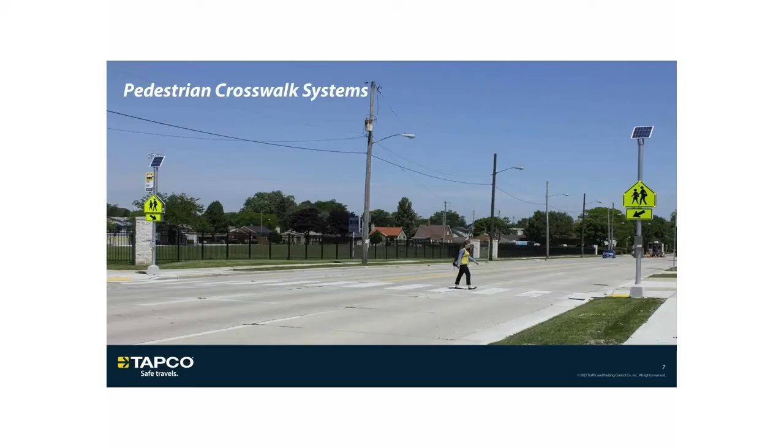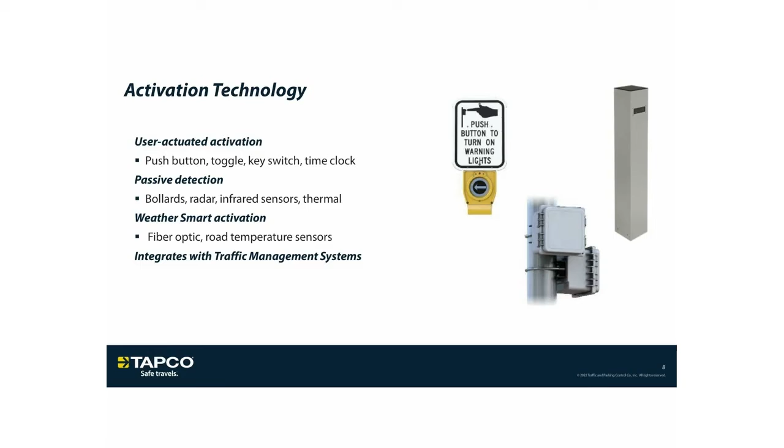First, we're going to talk about our activations. We do have our user actuated activations: push buttons, toggle switches, key switches, time clocks. Some of the other things we have on the contract are our passive detections, including bollards, radar, infrared sensors, and thermal, which we'll talk about a little later. We can also do smart activations with sensors that deal with temperature, animals, radar, fiber optic, and come to TAPCO for your custom solutions. We can integrate with most traffic management systems.

One of our newest push buttons is our INX push button. The great thing about this is it's Bluetooth capable. It does have the PedApp for visually impaired, so they can activate them on their phone. It's also a push button that has great communication. So in areas where there's an older generation or visually impaired individuals, this works great, but anybody in the area can use it.

Also, with COVID coming on, we have our newest one, becoming pretty popular, which is our IDX. It's a touchless option. All you have to do is wave your hand in front of the button and it will activate.

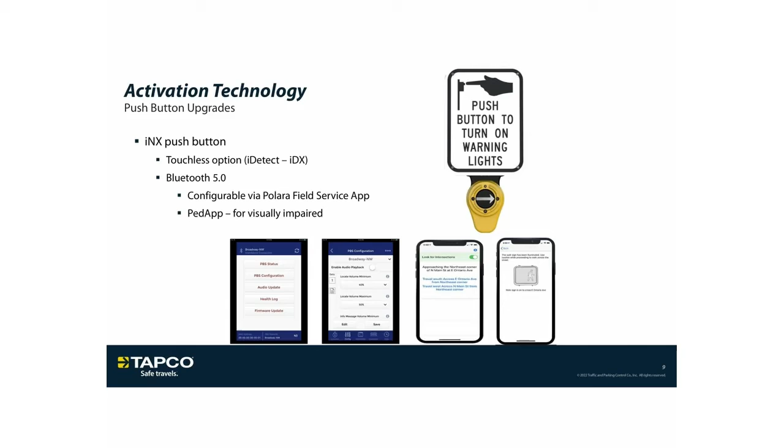Next, we have our proprietary radios that TAPCO's come out with. For wireless communication, the great thing is we can always trench for you if needed, but the great thing about our systems is we do have wireless communication.

The 900 megahertz hopping frequency allows for instant communication, especially in RRFBs where there are tight tolerances to be held. We've made our wireless radios easy to use with easy to read displays and a joystick.

The other great thing is we can also extend the distance. We have a range of up to 900 feet, and by doing multiple options and repeaters, we can increase that distance if needed.

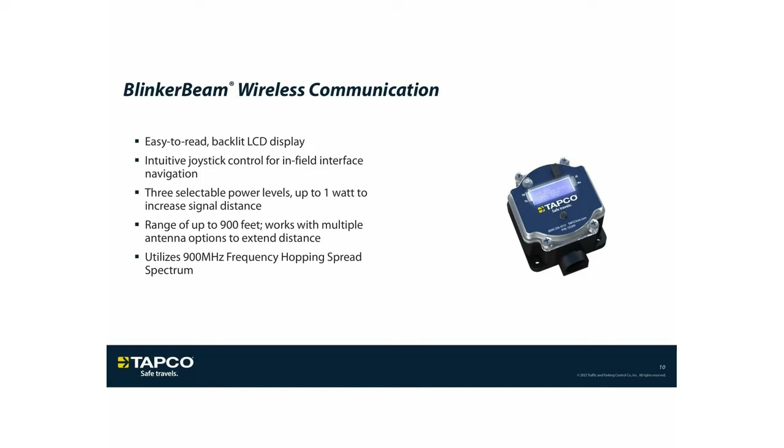Next, we'll get into our LED enhanced warning alerts. The first one is our blinker sign. The great thing about our blinker sign is that it's a highly visible traffic sign with LEDs embedded around the perimeter. They're MUTCD compliant.

They also come in multiple sizes, colors, and legends. We have 3 LED colors available: amber, white, and red.

Our team, myself included, will help you with the right design and fit if you'd want something custom. We also provide artwork and definitely proofs, touched on the points there.

Some of the other great things about our systems is they usually come solar powered, and we can solar size them based on autonomy and different applications. We do have 24/7 options as well. We have quite a few different options, but we can solar size them, and they're MUTCD compliant.

Some of the other features are we ultrasound weld the LEDs for an environmentally sealed fit. We use aluminum channels to protect against inclement weather and tampering. We also use 080 aluminum, and 3M's diamond grade reflective sheeting with 3M's anti-graffiti overlay film, so it's easy to remove any graffiti that may show up.

Alex, is there anything else that you want to add that you think is key about our blinker sign?

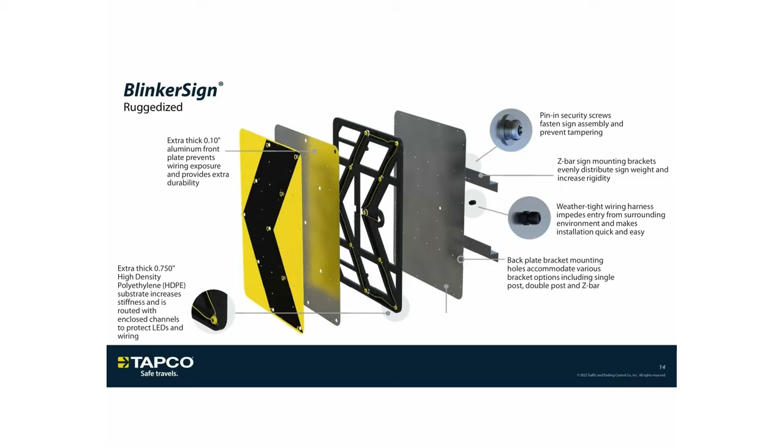Next, we have the blinker beacons. These are great, industrial grade. We can do 12-inch or 8-inch beacons, and we can do multiple configurations, so we can definitely customize them.

Either top and bottom, or a lot of times with school zones, I've seen it where there's two beacons, top and bottom, facing traffic, and then there's one on the backside on the top as an indicator for anybody coming the other way.

Kevin, are there any iterations or setups that are most common in Ohio that you're familiar with? Anything we've been able to produce here that works well for your customer base? Yeah, definitely. The top and bottom is definitely used for a lot of school zones, and having that beacon on the backside at the top is another popular function in Ohio.

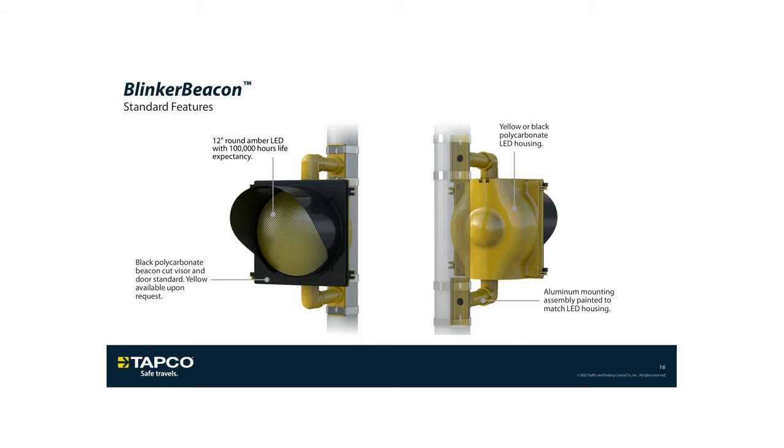One of the other things to touch on quickly is we have the 12-inch LED shown there. We can do that in amber or red. The LED housing can come in yellow or black, and we also paint the assembly to match the housing color. We also have the cut visors, and those are standard black, but we can definitely make those yellow if needed.

Next, we have the rectangular rapid flashing beacon, or RRFB. These are FHWA compliant. We have the wig-wag plus simultaneous flash pattern, and the light bars automatically dim for ambient light usage.

Also, real quickly, we do have a black powder aluminum housing, but the great thing I want to point out is the pedestrian indicator can be set in the field. We have a little plastic cover that you just remove either on one side or both sides, and a lot of times that is a requirement, so pedestrians can see that the system is activated.

Yeah, Alex, is there anything to add? Yep, just to add a little there—what's really nice about TAPCO's RRFB systems is the ability for it to be flexibly mounted and field configured, with that pedestrian indicator being a knockout on either side of the device, the universal mounting kits, and maintaining IA 21 compliance. We can alter flash patterns and manipulate our controller as appropriate for any unique application. We've put these rectangular flashing light bars in applications for wrong way driving in the past, using a wig-wag flash and things like that. As you get creative with devices, obviously we're going to lean on FHWA and MUTCD compliance again and again, and that's the standard we're all complying with. But if there's a unique application, if there's something we want to be creative with, float that past us, and our team will take a look and offer consultation about what we can do to meet your goals.

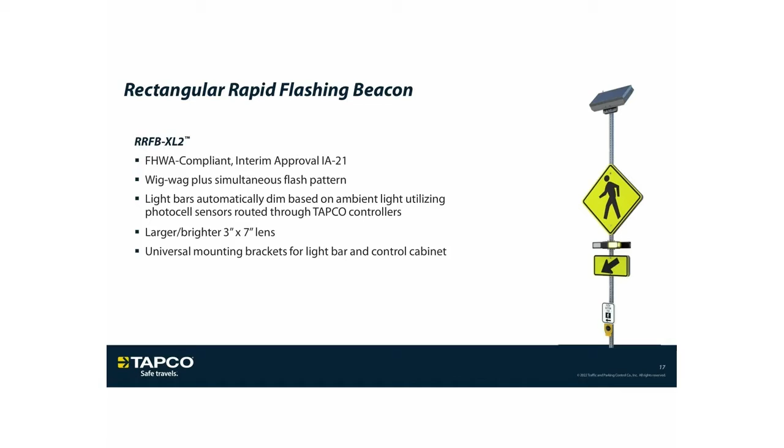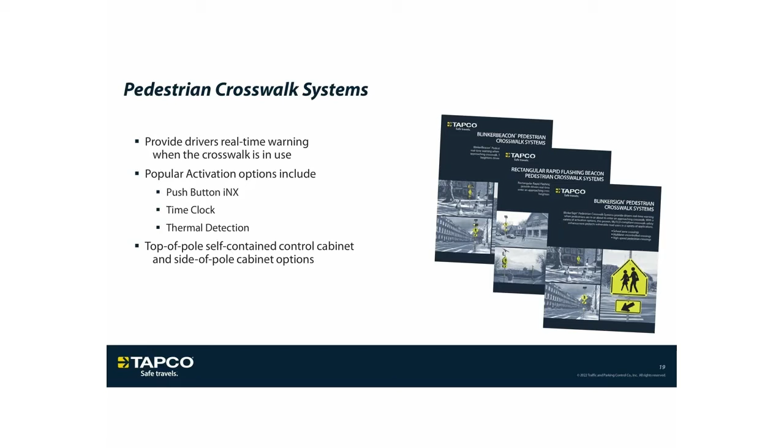So just touching base again on the pedestrian crosswalk system, we like to provide that real-time warning. We definitely have multiple options, the new push button INX or IDX, time clock, thermal detection, which we'll touch on in a bit. Come to us, we'll get you designs and customize. As you can see, we have a lot of different pamphlets about it, so I can definitely get you that information if you're interested.

But once you set them, unless you have to change a battery, they're pretty easy. They take care of themselves, and they're also easy to install. As you can see, we have multiple different options. We like to use 4.5-inch poles, but if you have an area where you need to use a 2-inch square Telespar, we can definitely do that. We can size these however you need, and use them for our different systems.

Now, what's going to happen here with these is we're going to use our 20 watt and 13 watt options, and they may not be applicable to certain areas in Ohio, but we will definitely take a look at that and make sure.

That's a bit more inclined with what we see in northern states and what the solar needs are in those particular regions, trying to maintain that we have a certain amount of autonomy with the system. Typically, TAPCO is aiming for no less than 7 days of autonomy with our system. So we'd like to be closer to that 13, 14-day mark. We'll work with solar sizing to meet your particular autonomy needs. The idea is that the system will run in perpetuity without days of inclement weather or things like that affecting the performance of the system.

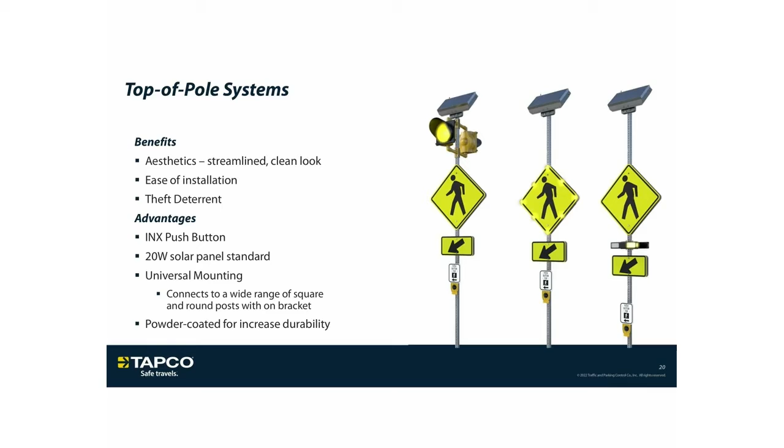Thanks, Kevin. So TAPCO, a couple of years back, started leading conversations in the industry related to connected vehicle interfaces and how those devices integrate into roadside units and RSU infrastructure. We know a lot of areas have these conceptions of smart cities and RSU deployments just kind of as future state plans. What's really great, and I want to emphasize about TAPCO's systems, is we're ready for that discussion now without making any additional changes to the existing hardware set.

What I mean by that is our connected vehicle interface, the device that talks from the TAPCO Crosswalk system to roadside units, is a module that can be added on with wireless communication to any of our existing systems the way that we sell them, the way that we produce them today. It's using our proprietary radio network to transmit the connected vehicle information to our translator box, our connected vehicle interface, or CVI, to the roadside unit, allowing the roadside unit to talk to onboard units within the vehicles.

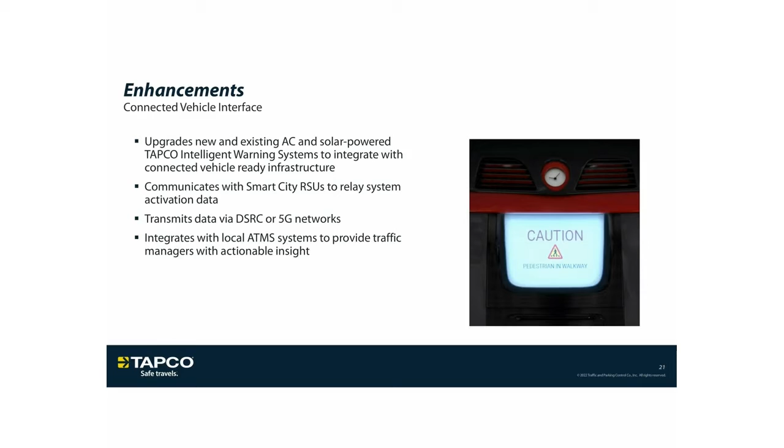We're agnostic in our space in terms of which RSU we're going to be working with, and how it interacts with our system is wireless, making the integration and that development, when we're ready for it as a team, very easy to just move into when we're at that point in conversation.

The connected vehicle interface, again, is a module that sits with a connection to the roadside unit. It's a wireless communication back to the TAPCO equipment on the roadway, so the crosswalk or the high water system or whatever it is that we're deploying as a warning system in that particular instance. And then it's an RJ45 Ethernet connection back to the roadside unit. So it's a very simple, very plug and play kind of device.

We work with the configuring of these systems very intimately, and we're here to help with the design and implementation of them. So as you have connected vehicle applications, or if you're looking for more information on connected vehicle applications, feel free to work out a plan with TAPCO as a partner. We're here, again, to be very agnostic and hopefully consultative in this space to offer some guidance about how we can use our money now to future-proof and not have to replace systems that are going to become obsolete when this is more prevalent on our roadways.

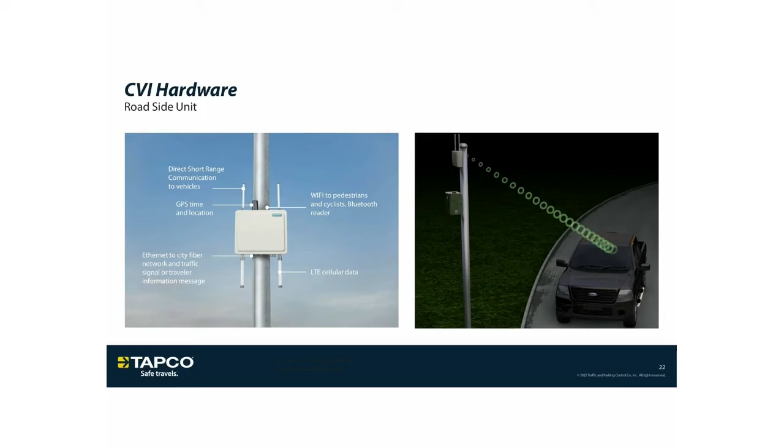LegendViz is one of our newest product offerings that we just launched last year. So what is LegendViz? That's probably what you're asking.

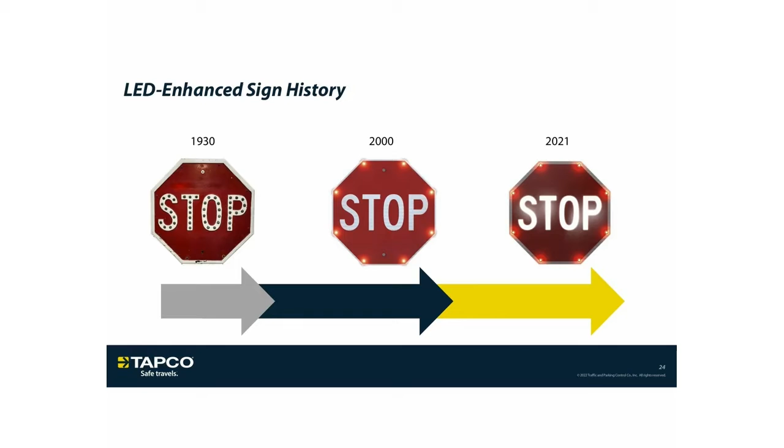When we look at LegendViz, what we've done next is combined the LED perimeters along with what they were attempting back in the 30s, by illuminating the legend itself. We'll get into how this works in a bit, but that's kind of where we're at right now.

So when we take a look at what our LegendViz signs are, essentially they're going to be signs where we illuminate the legend. The three options we have right now are wrong way, do not enter, and of course stop sign. We offer these in solar and AC powered, and also with LEDs around the perimeter, or just with the legend illuminating at night.

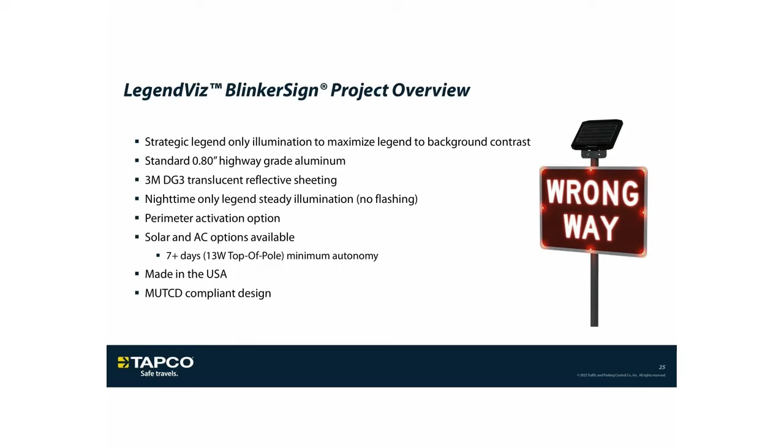The question you're probably asking is, when does this actually illuminate? It's a dusk till dawn setting; we don't illuminate during the day. When it comes without the LEDs, and you'll see this in a few moments, the sign itself almost looks like just a basic static sign you'd see out on the road. The design itself, this is one question that always comes up, is MUTCD compliancy. These signs are MUTCD compliant, and we'll get into that in a moment.

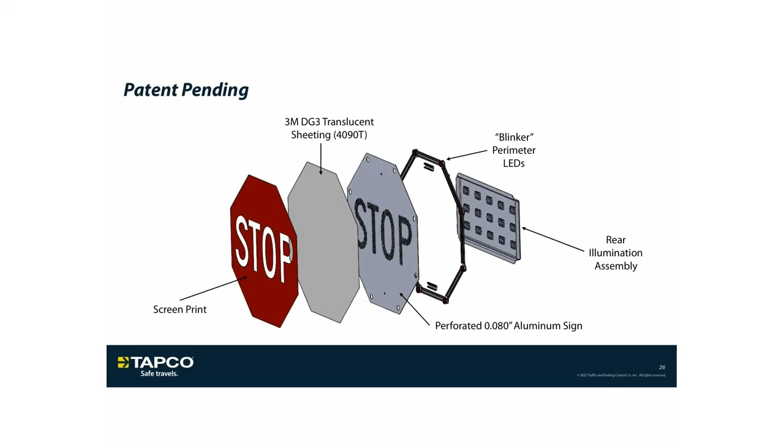We start off with essentially the metal substrate in the middle; we will have routed out LEDs if that's an option for the sign, and the legend will also be routed out. Behind that, with the LEDs if included, that'll be behind the substrate, and in the back we have the rear illumination assembly. This is placed right behind the legend, and that's what causes the illumination. Then we apply the DG3 translucent sheeting over that substrate, and a screen printed top on top of that. So when that's all sandwiched together, it's a really nice streamlined product.

As far as mounting these goes, one thing TAPCO has been a big advocate for over the years is trying to make everybody's job easier when it comes to installing signs, whether it's the RRFBs Kevin went over earlier, beacons, or currently with LegendViz. One thing we offer is our universal pole adapter. This allows you to mount it on a whole variety of things. There's nothing worse than going out in the field and not having the right brackets or screws, or something being a little too small or too big. This right here gets rid of a lot of that complication.

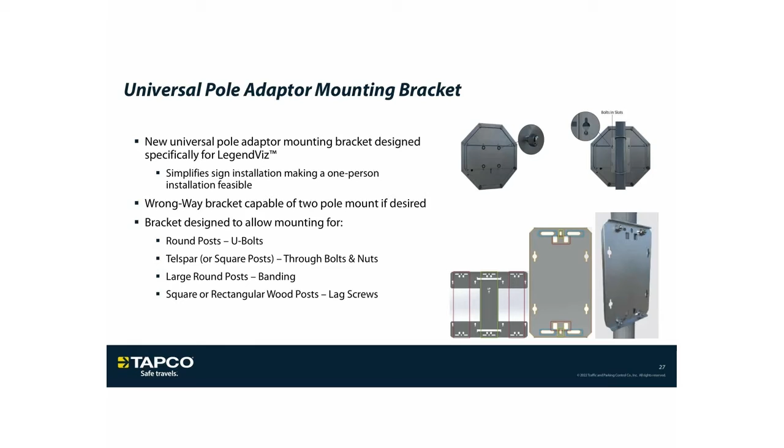With it, you can put it on a square, 2-inch square post or larger round posts. You can even put this onto your utility post. So really, it gives you pretty much every option that you would need.

As I mentioned before, we do offer these with LEDs around the perimeter and without the LEDs. Again, dusk till dawn for this. And then we can do the LEDs in a different variety of ways.

A project I just worked on recently, I'm located out in North Carolina, was with Duke Energy. What they had done is an intersection conflict where at night the stop legend would illuminate, and the LEDs were actually radar activated. So it shows you we can do a couple options with it. It's not your straight 24/7 unless you want it to be that way.

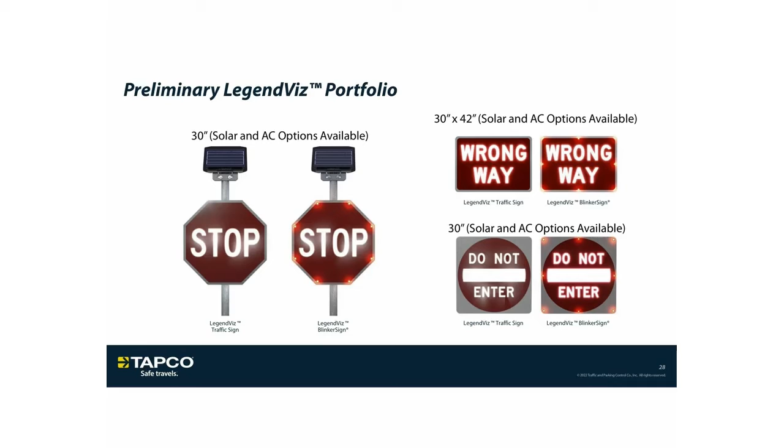As mentioned before, right now we currently have wrong way, do not enter, and of course stop. The stop sign is going to be 30 inches, these are 30 by 42, and 30 inches for the do not enter.

Touching back on the MUTCD compliancy, not going to get into that too much, but you'll see over here in the table, we talk about how it's lighted behind the sign face and then light emitting diodes. What this means is that whether it is by itself or with the LEDs, it is going to be MUTCD compliant. That's always a big thing. We want to make sure we're following the letter of the law when it comes to the MUTCD. So you can be rest assured that if this is something you guys try to implement, there will be no type of conflict with what MUTCD says.

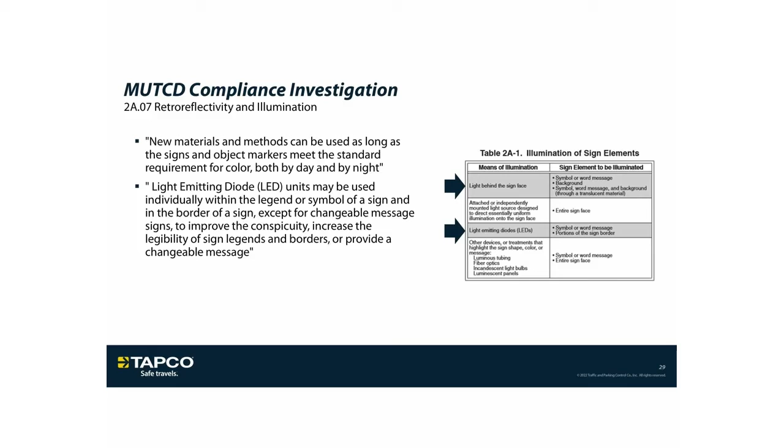As far as the LEDs go, not going to get into the specifics here, I'm not going to bore you with that. But when you look at the LED range, as far as the actual degrees of visibility, we go at 135 degrees. The reason we do that is it's going to provide more of a peripheral view if someone's coming around the corner, coming up to a stop sign, or let's say you have four-way lanes, two going one way, two going the other, and someone's in the left lane. They're still going to be able to see that sign, still going to be able to see that illumination coming at them.

But we don't do it too wide because many times these will be in residential areas. You don't want this flashing into someone's house. You're going to get a lot of calls from someone trying to read a book or watch Jeopardy at night and being like, that sign's annoying me. So that's why we decided to put it at 135 degrees. It's kind of the best of both worlds.

And then visibility with this as well, you're going to be able to see this from over 500 feet away. It's just something where at night it's really going to make the legend pop.

One of the issues we ran into with the LED stop signs was you had the washing effect when it was just the LEDs around it. With the LegendViz, what that does is eliminate that. What I mean by the washing out effect is the LEDs go around it and sometimes the message itself will be blacked out. You hope everybody's going to know an octagon that's red means stop, but people do surprise you. With the LegendViz, it eliminates that effect.

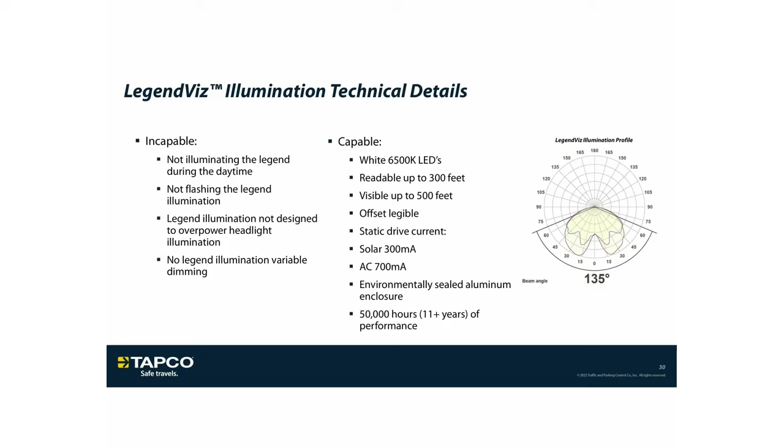As far as how solar works on these, that's always going to be a question. I know in the past with some solar products, you got these big giant solar panels, big battery packs. Again, TAPCO has really been at the front of development here when it comes to making sure our solar is small but effective. Economy is such a great thing to have when you have solar equipment, but also aesthetics and ease of installation. I've been on plenty of installations before where you're putting up 55 watt panels or larger, or multiple ones, and that can be a task upon itself.

Our goal with the LegendViz is to be able to get you guys the product and you guys can get it up that day.

With a 13-watt panel, it really provides that when you're going to be putting it on a round post or square post. It's essentially what I call drop and play - that's my terminology, where you'll have the solar panel on top and the wire connectors go right down the pole into the sign, and you're ready to roll. It's a very quick installation, and it's also aesthetically pleasing.

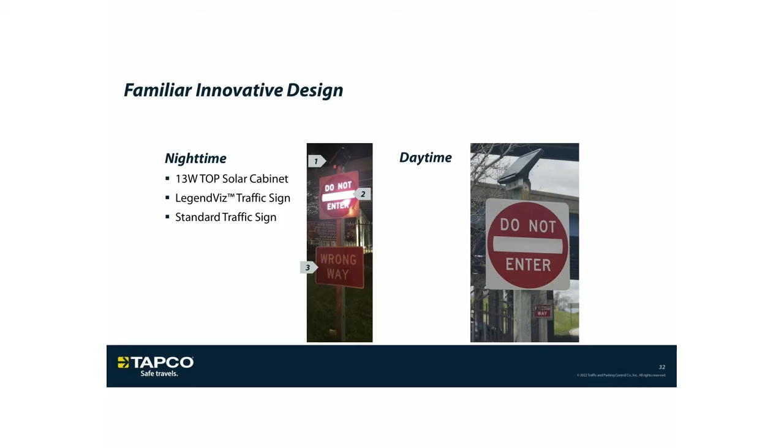And with that, we'll go into the school zone system solutions. So, talking about the school warning zone LegendViz system - currently we have three. This is something that's very popular in Ohio. We do a lot of these, especially with the top and bottom beacons.

But we can also do a blinker sign with that, so that we have the amber LEDs at the top and the white at the bottom. We also do the S1-H1, which is the Ohio required 20-mile-an-hour speed limit sign, so we are aware of that and make sure we do that.

Some of the things that are great about this system is that we do have a time clock, but you can also go to our cloud-based system. We call it the BlinkLink, and it can definitely get you some more details. That's a great system where basically from the seat of your couch or your office, you can make changes and also get alerts if something is wrong, like if the battery's running low or other details.

And definitely if the time clock is on, it's shown on the bottom right there. I'm sure, Alex, you've got something to add?

Adding a little bit more, Kevin. I apologize for always interjecting here, but I love this conversation. Touching base on our BlinkLink software just a little bit here - that's a remote management software that is involved with a lot of TAPCO systems.

We use it in a lot of different ways. You may be familiar with it if you've ever come across some of our warning devices that send high priority alerts, such as wrong way driving systems, flood warning systems, overheight vehicle detection. But it's used in a bit of a different manner with school zone systems - really it's a system management software.

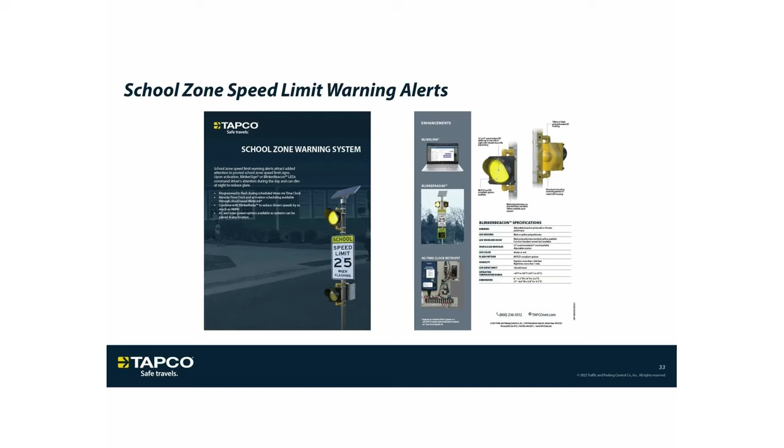And that kind of leads me into our next product, which is our radar feedback signs. We work with Traffic Logics on these. On the contract itself we've gone with the Evolution series, because it's a really great series. It's a polycarbonate housing, so it's a lot lighter. We also have a universal mounting bracket we can sell with these, which makes ease of install.

One of the great things is I have a lot of municipalities that say they like to use these signs in one area for 3 months and then want to move them. With this universal mounting bracket and the lighter design, they can definitely move those, or they can buy additional plates, which are also on the contract, so you can move those as needed.

One of the other great things about the Evolution series is it comes with 1-year cloud connectivity, so you can pull reports, get notifications, and make changes from the comfort of your office on any web-based platform you have - cell phone, tablet, or laptop.

You can pull reports and have multiple individuals on there. So if you have a police chief or a school superintendent that wants to pull some of that data, maybe needs additional resources in that area, you can definitely get that detail.

One of the other things I want to touch on with that cloud connectivity: let's say you decide after 1 year you're not using it anymore. The great thing is the Evolution series is also Bluetooth enabled, so you can go out to the sign itself and still make those changes and pull the reports - you just have to be in range of Bluetooth. But if you love the cloud system, we can do a renewal for you.

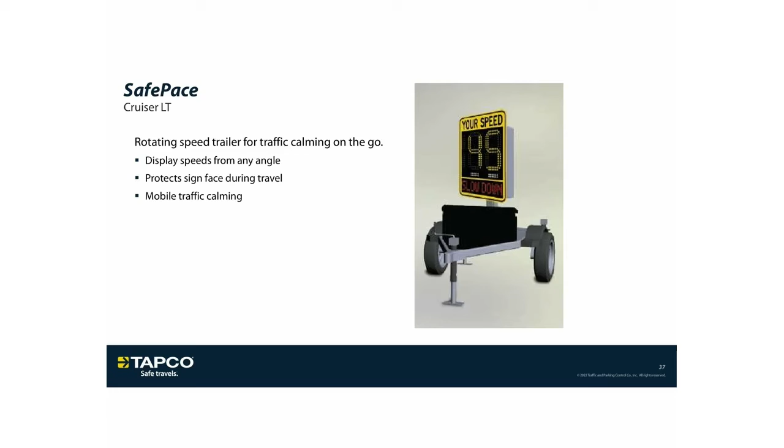Next, we're going to touch on some of the enhancements we have that are also on the contract that go with our pedestrian crossings. I'm going to turn it over to Alex here for our thermal.

One of the passive activation methods - TAPCO's taken a lot of initiatives in the last couple of years to enhance the ability to accurately provide detection within a crosswalk without having to rely on people doing what they're supposed to do and working with tactile push buttons. We know people in general become very non-compliant very fast with their interaction with some of these devices. So relying on this level of automation and this ability to detect impartial to someone's touching of a push button, and being able to do so accurately, has become very, very important.

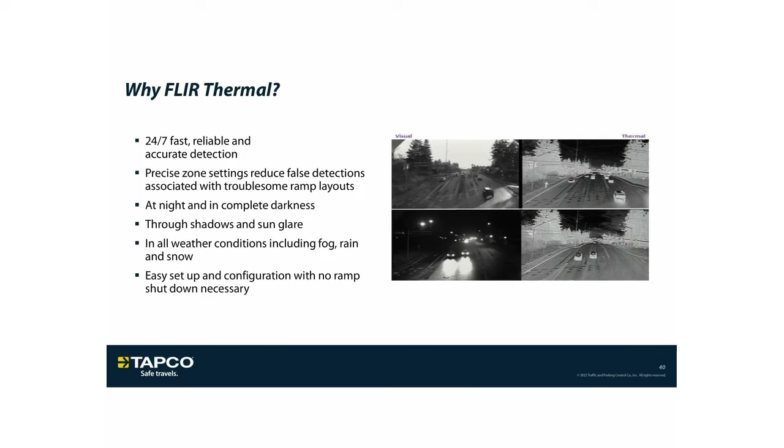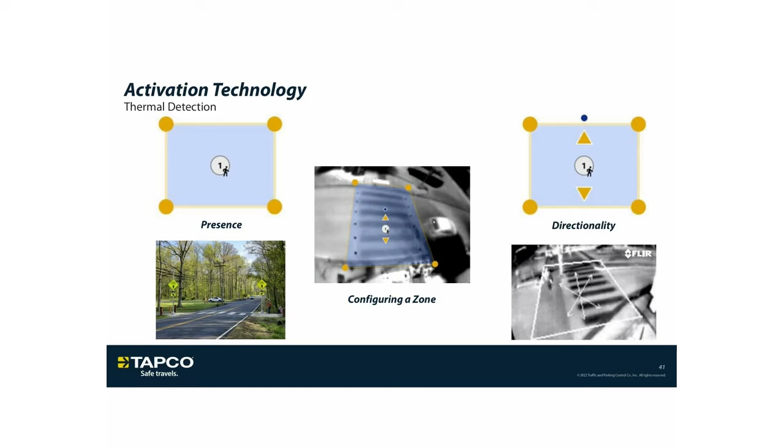Additionally, with our particular thermal sensor, we're able to look at very channelized areas of detection. We're able to focus in on that crossing and measure different bodies of motion in a directional manner as they enter the roadway, come up to the roadway, things of that nature. So we're only looking at pedestrian traffic as it actually advances through the crosswalk, not traffic moving perpendicular to it. We're able to configure based on the presence of a pedestrian, adjust those zones very fluidly in the field, and determine directionality with the right angle. So if you have an atypical setup, something very unique, thermal is still a very viable option, and we can configure those polygons and zones particular to your application.

Again, I mentioned seeing through occlusion that would otherwise affect competing sensors. Thermal isn't beholden to a bright sunny day and working only in those parameters - we're able to see through fog, rain, snow, and things like dirty lenses that cause issues with other sensors; thermal sensors are less subject to it. With that ability to see through those atmospheric conditions, we're able to increase our system uptime and reliability of these solutions. Additionally, we're able to work in pedestrian counts and different types of analytics important to some of our end users, so as you're doing traffic studies and field research, this sensor can also be a tool for that.

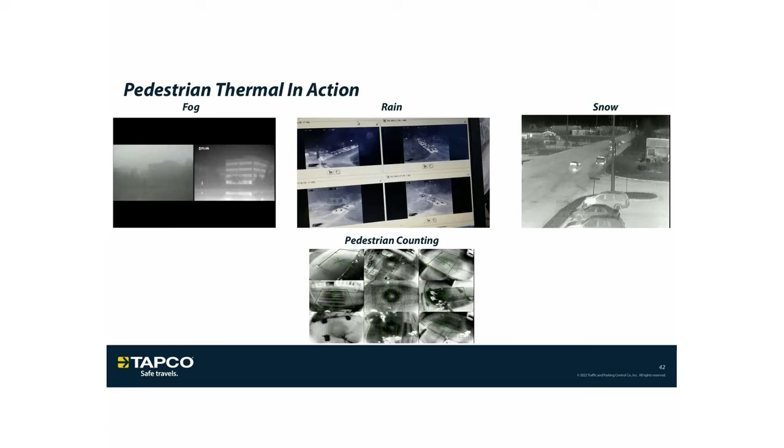Here's some quick images again highlighting the directionality and configurable zone methodology that we have with FLIR devices. We use a TrafiSense device for some of our applications, and we also have the TrafiOne available for pedestrian applications. So you may see, depending on where you're looking within TAPCO's portfolio, different comparable FLIR devices. We size the solar and system for what's appropriate for your particular application.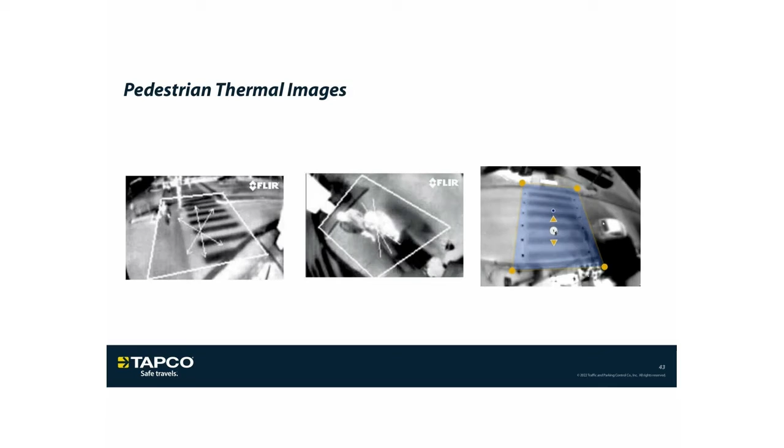Kevin, do you have anything to add on the infrared bollards? That's something we have, our infrared bollards.

In Ohio, a lot of municipalities and counties are using these for bike trails that are becoming very popular. A lot of times you're not going to have somebody stop and push a button when riding a bike, so it's easy for them to go through the bollard. It's also great for areas with more directionality of the pedestrian crossing, where there's a building on either side and they've got to go through, or they can't go around. It's a great option.

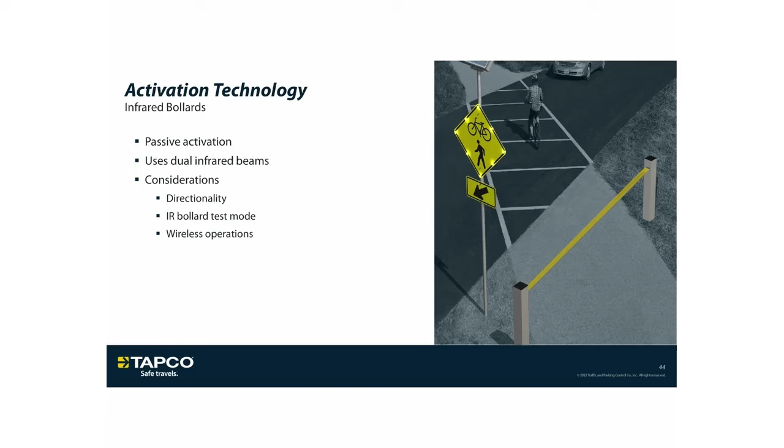One of the other things I've had this used for is when there are golf carts in the area, either a golf course or somewhere golf carts may cross. The infrared bollards make it easy instead of somebody having to get out and push a button. There's always a push button there just in case as a backup, but we do have that passive technology.

One of the other great enhancements that TAPCO came out with two years ago that has really taken off — there's a lot of places in Ohio that have this included with their system, and I can get you that information — is our SafeWalk Crosswalk Illuminator. It goes on with the systems. It's a very small upcharge, but these are also very small units, so they don't overhang the roadway. They're designed to only illuminate two lanes.

We do have areas with a median pole, so you have two lanes on one side and two lanes on the other. We can use that median pole to also illuminate there. As you can see, there's one beam of light that projects outward, and one that floods the approach area.

Kevin, to add a little clarity — it's important to understand this illuminator isn't necessarily meant to displace roadway luminaires or traditional roadway lighting. This is channelized light specifically to highlight the pedestrian as they're within the crosswalk or standing at the approach. It's only activated when the system is activated, so it's not light pollution. It won't obscure visibility within the roadway. It's only on during nighttime activations — at daytime activations, the photocell tells the system not to turn on the illuminator. During nighttime activations, the system will trigger the illuminator, just to add that clarity.

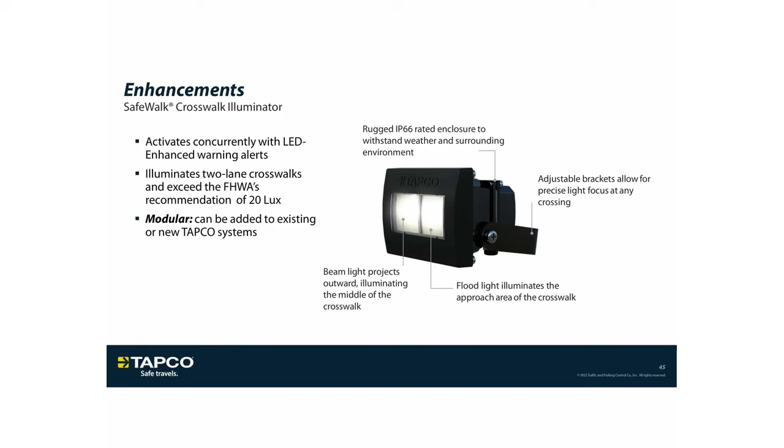Yeah, definitely, thank you. The great thing too is it's an adjustable bracket. So as we get to the next slide, you can see a great example here — an area where it's really dark. In Ohio, I've seen this used a lot in places with heavy pedestrian traffic, especially school areas where there might be after-school programs in the winter.

Another example is a public pool with a lot of traffic to neighborhoods on the other side of a busy road, where they wanted that additional visibility. Again, we'll look at the intersection or crossing, and make sure there are no nearby light poles, because if there's a photocell and a light pole directly over it, this won't activate and won't help out. It's meant for areas that are really dark, but it really does light up the pedestrian, as you can see in this photo. And as Alex pointed out, it's only nighttime activation — there's a photocell in there, and when the ambient light drops to the right amount, it will activate.

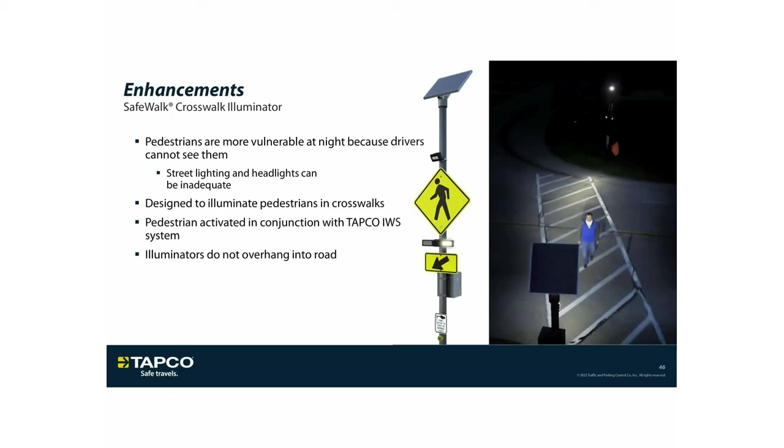Next, we want to talk about the TAPCO preventative maintenance contracts. This is something new this year that got added to the Ohio State contract. The great thing is, if you have a lot of systems or don't have the resources to be proactive in going out to your different systems, we can set up a preventive maintenance contract and come out once a year or semi-annually. The great thing is it reduces liability.

It's kind of a peace of mind. Everything's taken care of. It's a turnkey solution. The best way to say it is you set it and forget it. We're there, we're taking care of it. We'll notify you if a battery is going down, and we'll take care of it.

If you have some interest in this, we do have them on the contract, but what we can do is take all of your systems, look at it, and give you the appropriate contract. That would be a process, and we'd get our preventive maintenance contract specialist involved in that.

Last but not least, we have our Ohio State contract 063-22. The reason we're here today is just to share with everybody, because a lot of times municipalities and counties don't always understand exactly what's on the contract.

Please know that every time I talk to you, I will give you the appropriate pricing. There's discounted pricing and it includes free freight. But if it's something a little more custom, feel free to ask me, does this fall within the Ohio State contract? There are ways that we can do that.